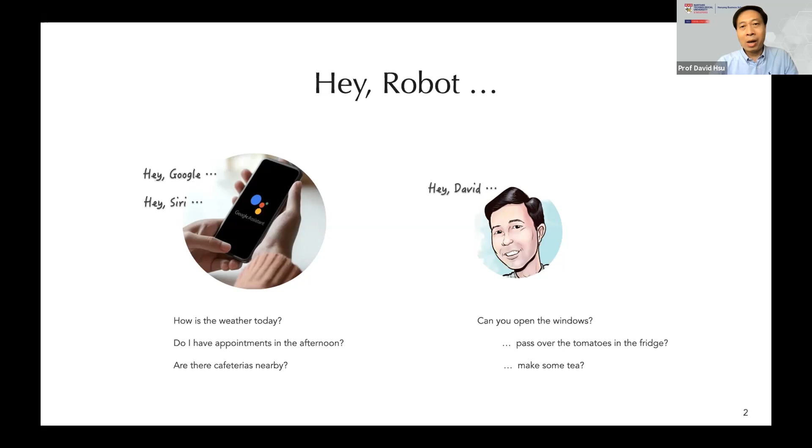Can you pass me an item in the fridge? Or can you make tea? Anything that requires physical actions, Google cannot help with. And that tends to be the kind of things I hear from my wife during the weekend. Since Google cannot help, hey Google becomes hey David. But I'm an engineer. What I want to do is build a robot helper to answer my wife's calls, so that hey David becomes hey robot.

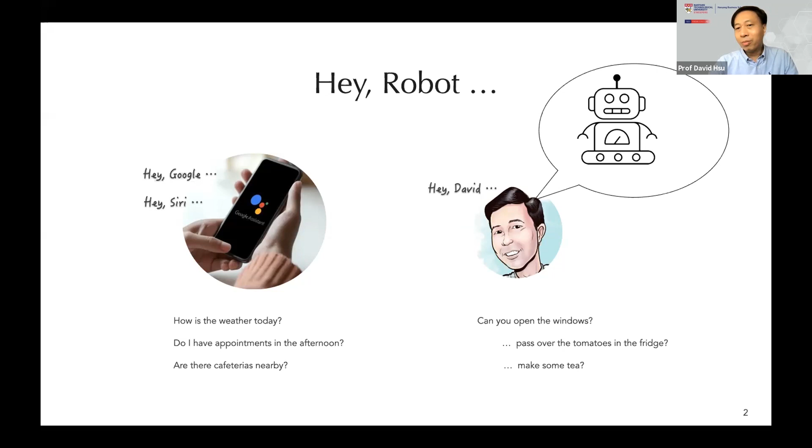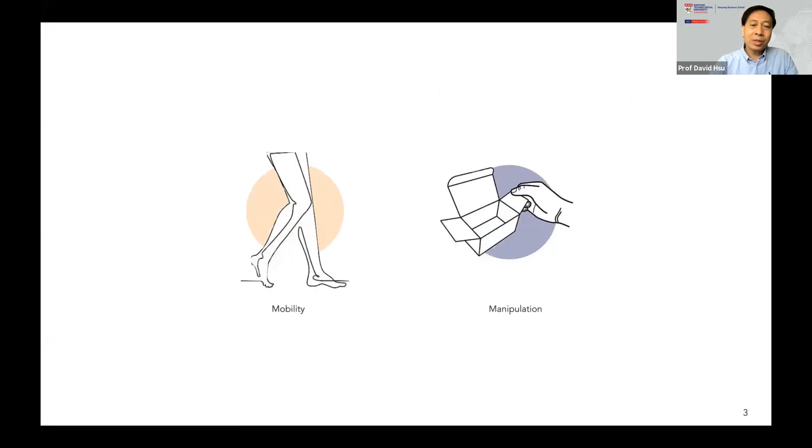To build such a robot helper, the robot must have a basic set of capabilities: mobility, to be able to move around, and manipulation, to use hands to interact with a variety of common daily objects in our household. Let me tell you some of the things we are doing here in our NUS laboratories.

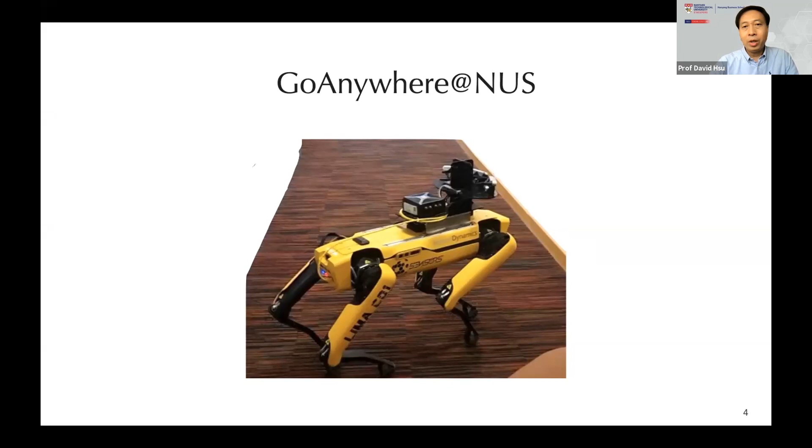So to be able to move around, we acquired this legged robot, which we can purchase. But the legged robot itself can move around only under teleoperation, where a human must directly use joysticks to operate it. So what we did is put on top of that a sensor package, mainly cameras, sometimes GPS units as well.

This way the robot is able to see and be aware of the environment around it. More importantly, this rectangular box behind processes the sensor input, connecting what the robot sees with the command of where to go next. With such a system, we hope our robot will eventually go anywhere on the NUS campus, and maybe even anywhere in Singapore in the future.

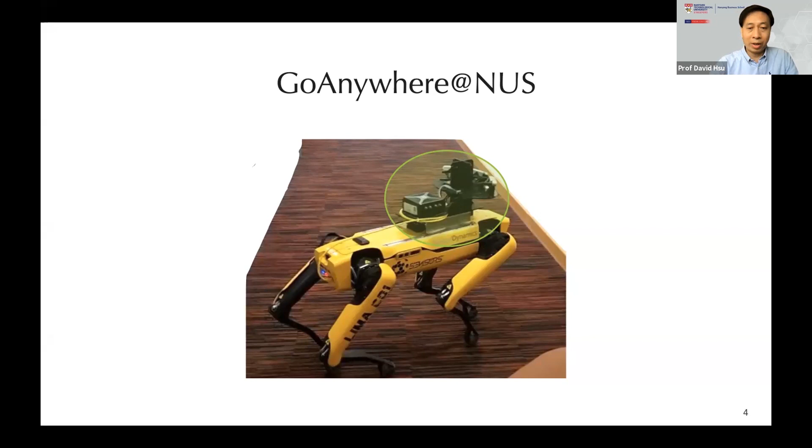Now let me show you what our robot is capable of today. This is the NUS campus, Kent Ridge campus, right behind our building.

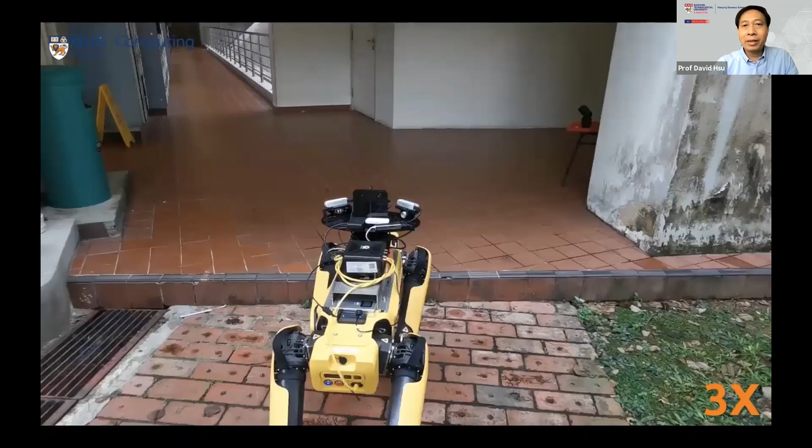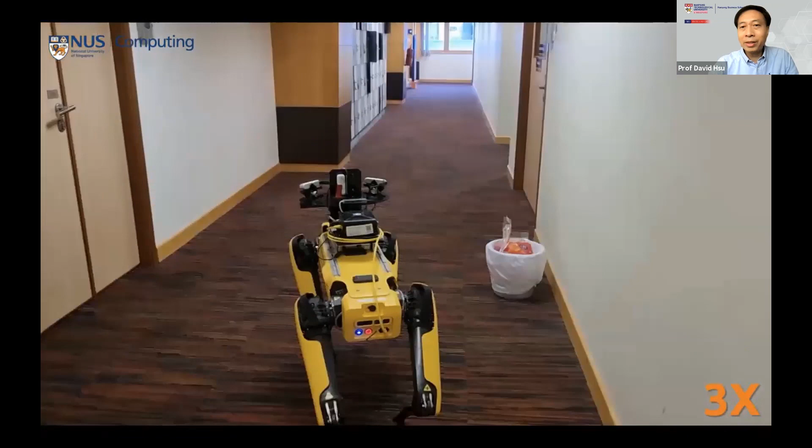There's a human blocking the way, it's going to stop. Entering our building in a semi-autonomous way, navigating an obstacle. Oops, there's an unexpected obstruction like this chair. The robot stops at a door, a glass door. The door opens, the robot realizes, moves forward, staircases, gives right of way to people.

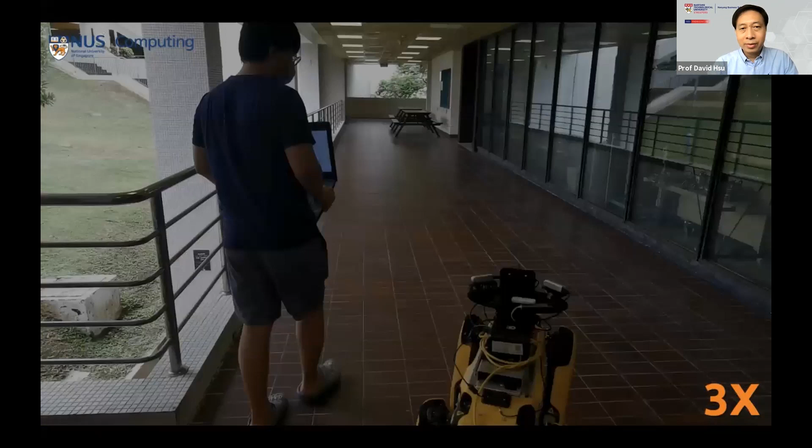You can see that our robots can operate in a wide variety of different environments, different kinds of ground surfaces. Some are tiled, some carpeted, some paved. It can also handle different lighting conditions, dark and light, and it navigates flat surfaces, goes upstairs and downstairs, and so on. So it can handle an enormous amount of variability, significant change in operating conditions.

Variability is very important for robot performance. Another thing important for humans is a sense of touch. A human has a very delicate sense of touch. In fact, that's a precondition for our agility in handling a wide variety of different objects.

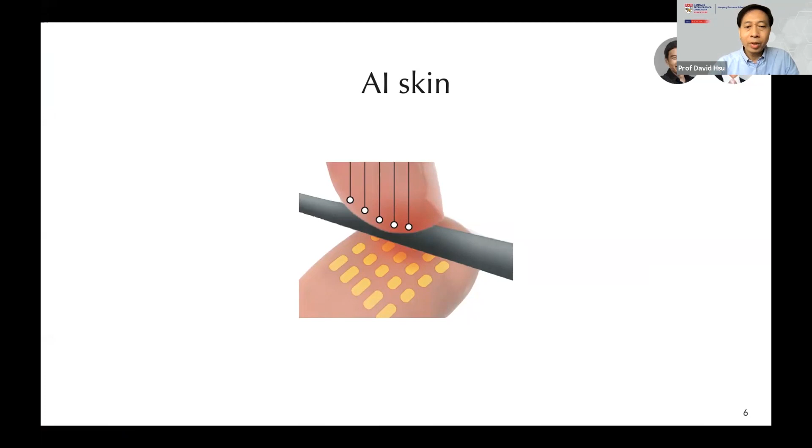So at NUS, my colleagues Benjamin Tee and Harold Soh are developing new materials and sensors in order to give our robots a high resolution, very accurate sense of touch, and they call it NUS AI skin. Now, when we put this AI skin on the fingertip of our robots, let's see what our robot can do.

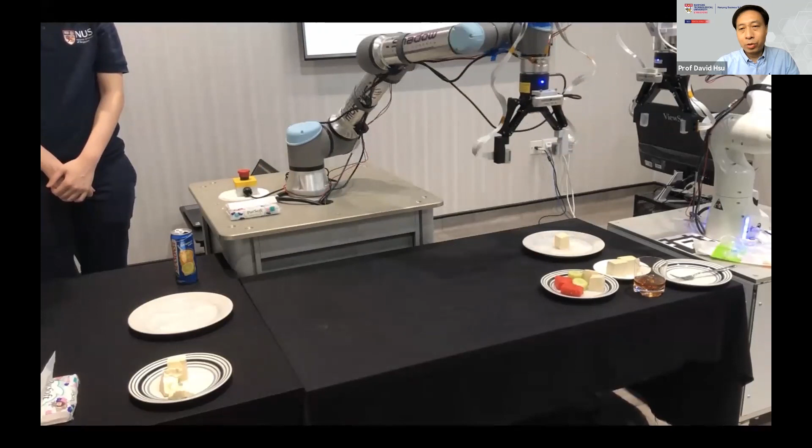It's going to pick up a piece of tofu. For any of us who have tried to pick up tofu, we understand the importance of that sense of touch. Without it, we wouldn't be able to apply the right amount of pressure, and the tofu might fall, or if we apply too much pressure, the tofu gets squashed and becomes soy milk.

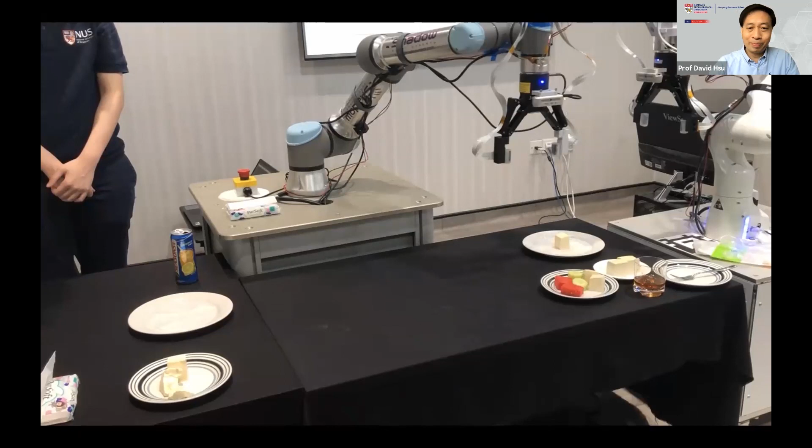Now, beyond NUS, in the greater robotics research community and robotics industry across a wide variety of fields, there are interesting robots. Let me start with one you're probably familiar with: these industrial robots that line up on assembly lines. They are very fast, reliable, very powerful, and work tirelessly. Because of them, we have cars and other manufactured goods at moderate prices. But they are kind of dull, right?

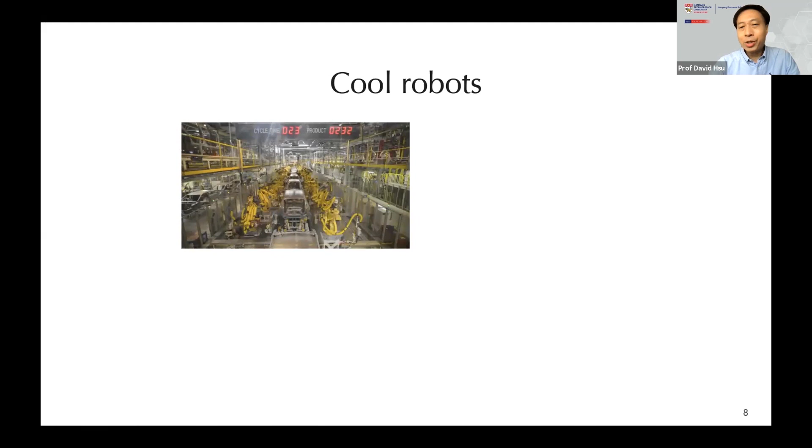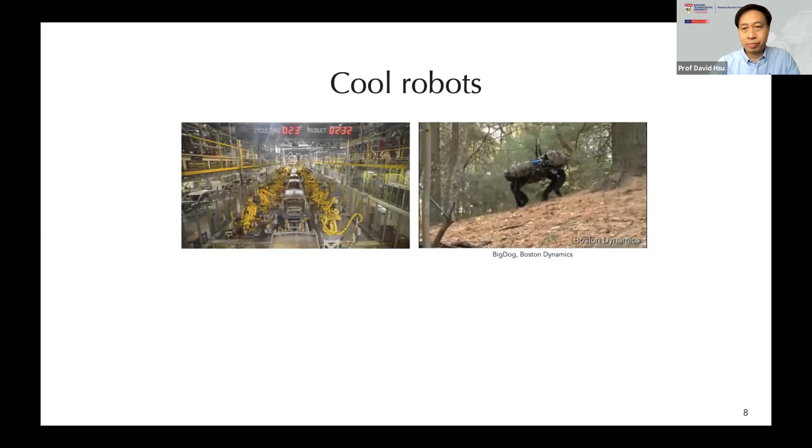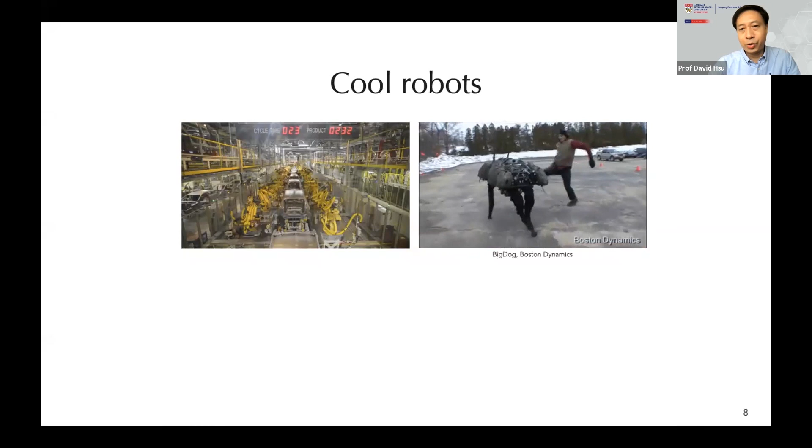In recent years, we have a lot more interesting robots. This one, called BigDog, also from Boston Dynamics, you can think of as a bigger and more capable cousin of the Spot robot I showed you earlier. It can navigate very difficult terrains, and has an amazing ability to balance itself dynamically and sustain disturbance, like this powerful sideways kick. Most of us, if we got that, would probably fall.

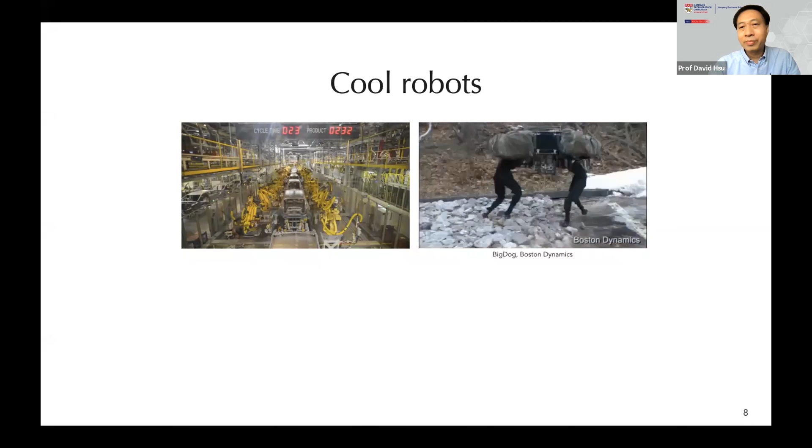It can even balance itself on a sheet of ice. Extremely challenging—look at the fast steps to regain the balance.

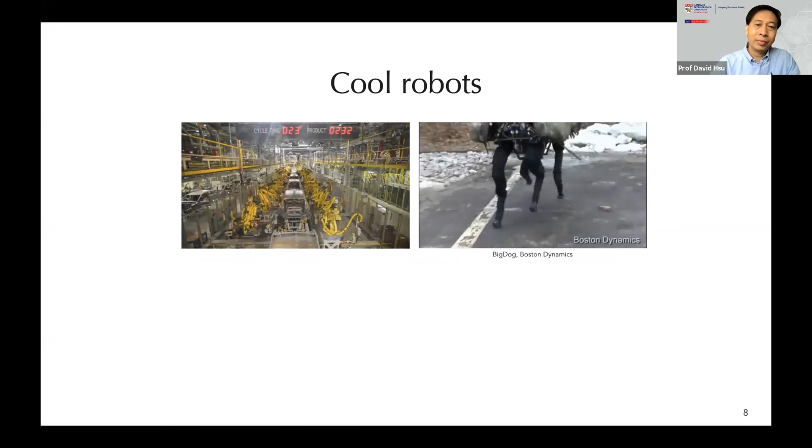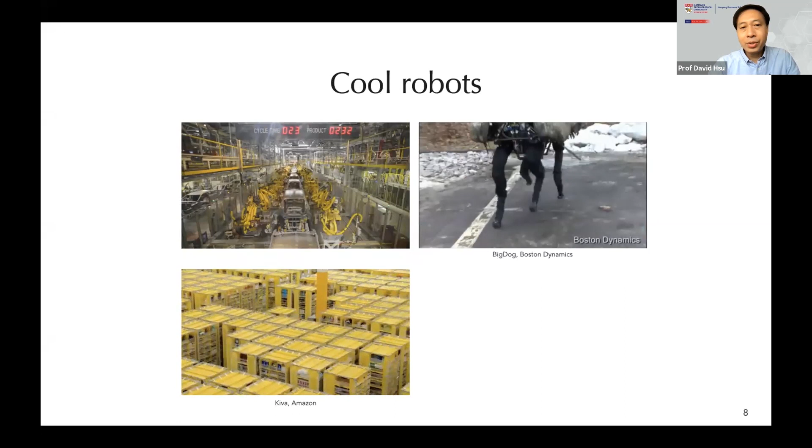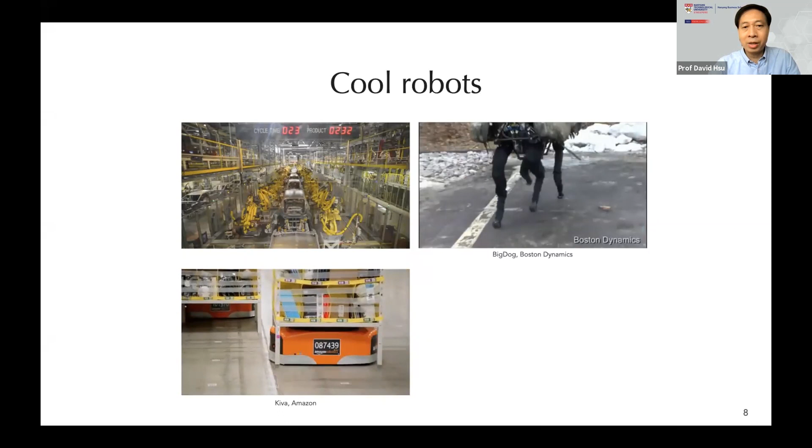Sometimes robots take unusual forms, and this is Amazon's e-commerce warehouse. Each of the shelves over there is actually a robot. To be precise, the shelf itself is stationary, but a base robot platform engages with the shelf and carries it around to a packing station, where a human packer picks up the items and puts them off for shipping. By doing this, the human packer can stay stationary while the shelves move around to the packing station. This reduces the total distance the human packer has to travel and vastly increases the efficiency of the warehouse.

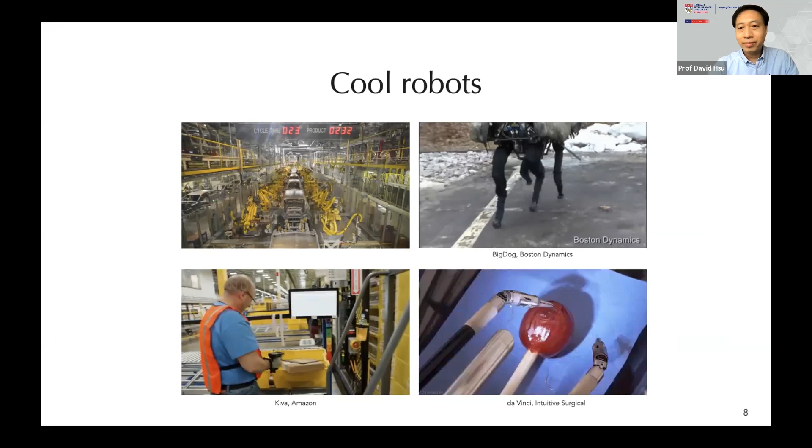Now let's try to tie a knot. This is just amazing, right, what robots can do.

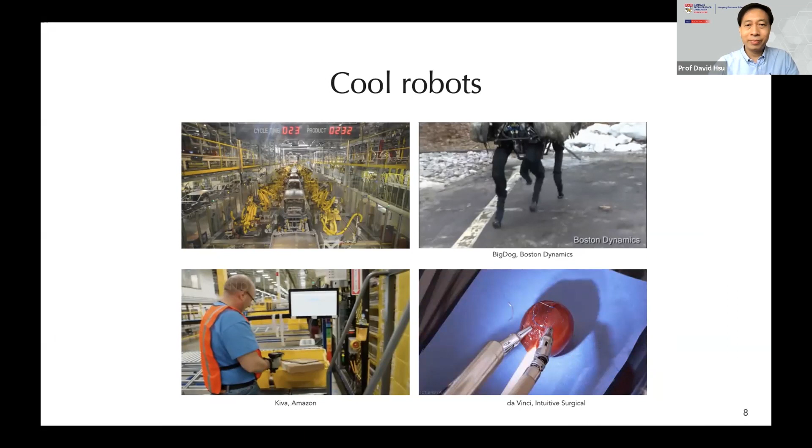Beyond autonomous driving, there's a lot of excitement in other parts of robotics as well. I picked up an industry newsletter—you can see investment in robot startups in manufacturing, agriculture, and cleaning services. And of course, there's always a lot of interest in autonomous driving.

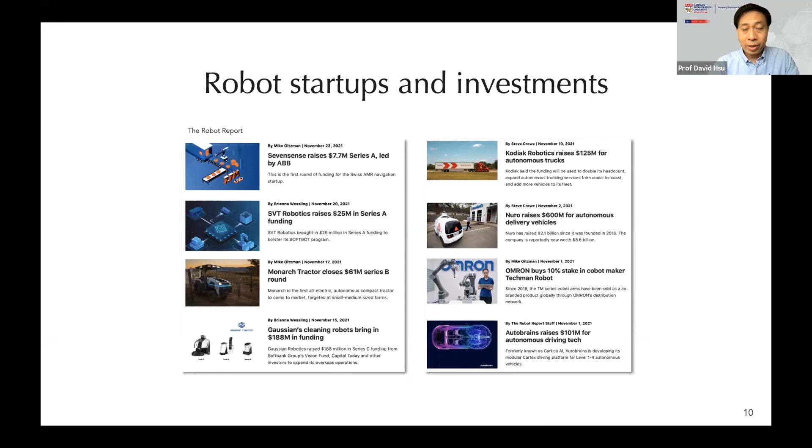Companies are also building collaborative robots to work with people together—they're called cobots. If you put together the numbers on this slide, it adds up to $1.1 billion, and that's only an incomplete compilation from a particular industry newsletter for the month of November—that is, this month.

Singapore, being a technologically advanced nation, has a piece of the action as well. About 10 years ago, NUS and MIT together collaborated at the Singapore-MIT Alliance program and built Singapore's very first self-driving car. That's the base technology that eventually led to the launch of nuTonomy, which was later acquired.

There are a lot more startup robotic companies in Singapore if you go visit Block 71 or NTU's Tech Park. NTU also has a huge robotics center, and for NTU students, faculty, as well as alumni, if you want to see with your own eyes firsthand interesting robots, that's definitely an interesting place to visit.

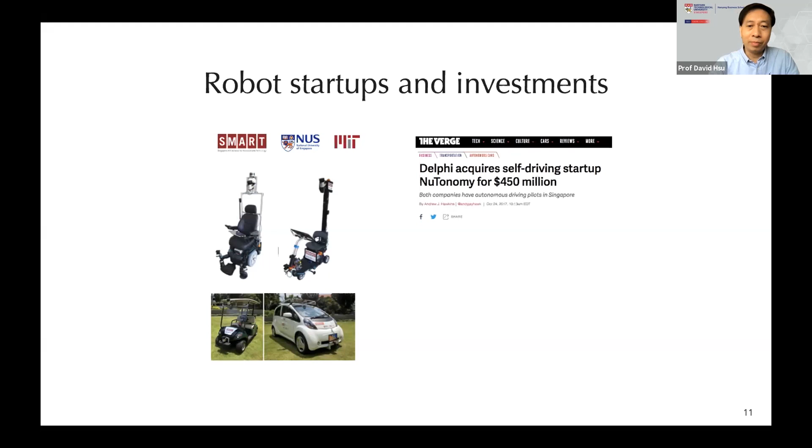Now, with all this excitement, I think it's easy to get carried away and still think about those robots we see in the movies. That would be wrong—maybe that can be my first message to you. Most of the things you see about robots in the movies are wrong, and we do not want to use that as our basis for decisions.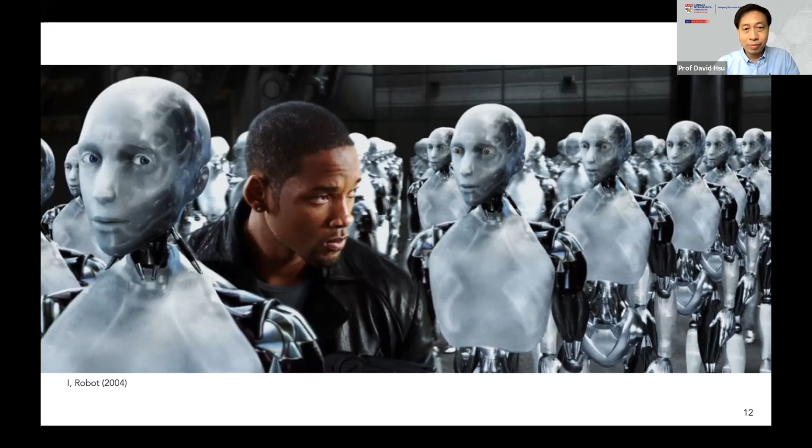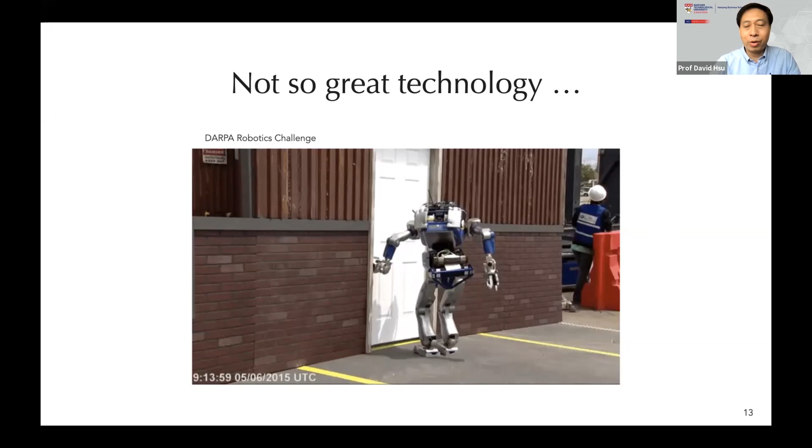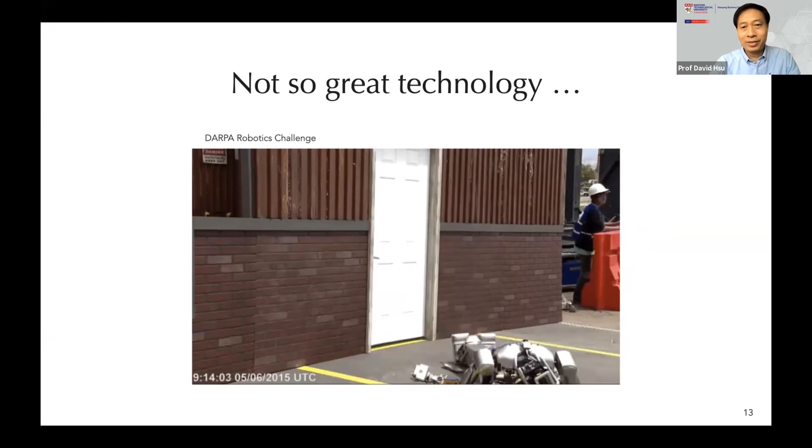Now, to keep us sober, I'd like to show you a couple of examples of not-so-great robotic technology. So this is a humanoid robot trying to open this door. This happens maybe because the robot tries to push forward the door and loses balance. Well, this may be because it fails to detect that the door is already open and tries to push forward, and therefore loses balance.

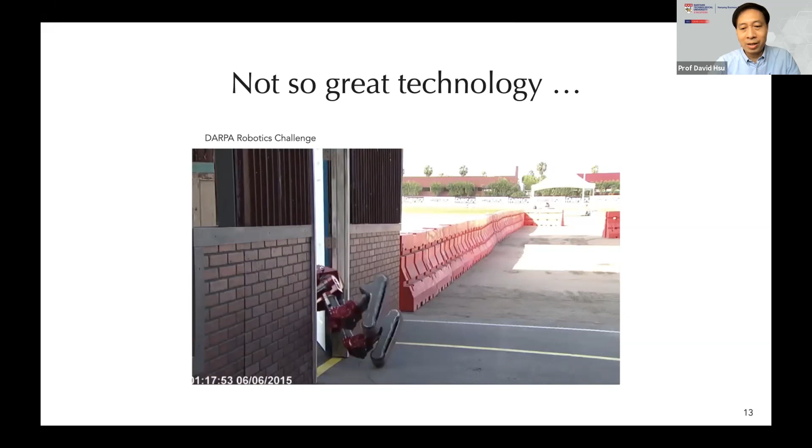How about this one? It's beyond me—I don't understand what happened over here. Now, if you think this is sloppy technology, it definitely is not. This is the DARPA Robotics Challenge in 2015, and they gathered some of the most advanced robots and some of the most capable robotics researchers and engineers. That, in some sense, is the state of the art that failed.

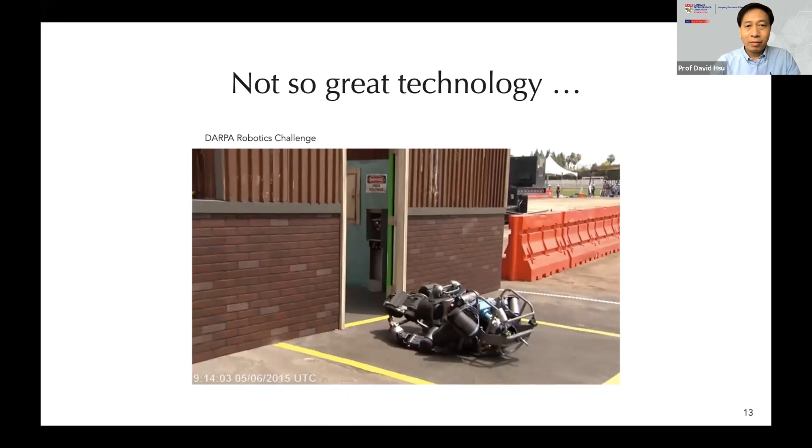Well, sometimes technology is no problem. Around this, also 6 years ago, the BBC reported on drone waiters to plug Singapore's service staff gap—that is, we do not have enough waiters and waitresses, so we want these flying drones to serve food and drinks in our restaurants.

We love flying drones as a cool technology. We would like drones to deliver goods and perform delivery services. But do we really want drones to deliver food and drinks in our restaurants? How about the noise it generates? How about safety? And how long can the battery of a drone last? How many customers can it serve before it runs out of battery? In fact, I wonder, other than the BBC interviewer, how many customers this drone has ever served?

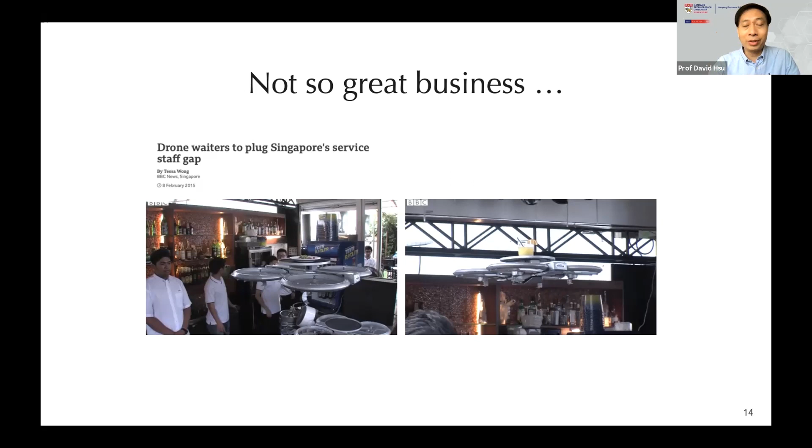So there's nothing wrong here. There's nothing wrong with the technology per se, but it's a misuse or misdeployment of the technology. And today, if you try to find this restaurant or find the drone that delivers food and drinks to serve in the restaurant, I'm pretty sure you won't be able to find it.

Now it seems paradoxical here. On one hand, we have these amazing robots that can perform surgery. On the other hand, this state-of-the-art robot cannot even open a door. So what's going on over here?

But the overall success of a robot system depends on the variability of the operating environment and how well the robot can handle all these variabilities. If we just watch a robot demo, especially a video, and believe our eyes, what we see, without context, without technological background, that's going to be very dangerous. I want to emphasize: the ability to handle variability determines the overall chance of success of a robot system.

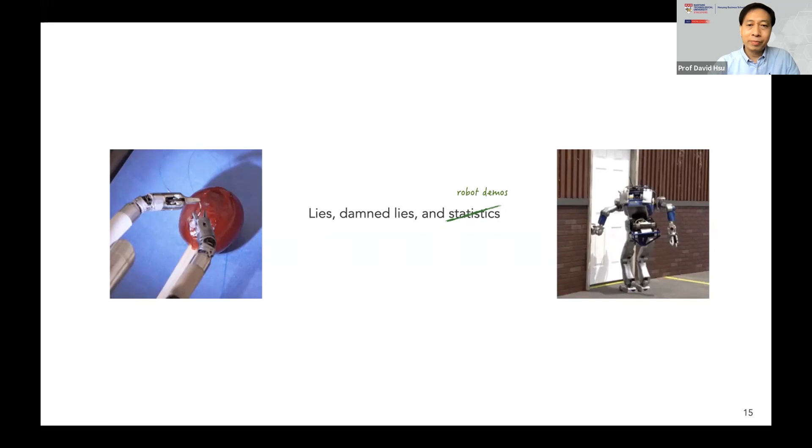Now, on the left, if you look at the surgical system, despite being very complex and requiring very sophisticated actions, in fact the variability is quite limited. Surgical operating theaters are tightly controlled, and the patient is under general anesthesia and hardly moves at all. But more than that, the Da Vinci system is teleoperated by a professional, a surgeon, and any residual variability is handled not by the robot system, but by the human.

In contrast, the autonomous humanoid robot system has to open a wide variety of doors. On your way back home from the office today, maybe take notice of the different kinds of doors you go through. Most of them are hinged, but some are sliding doors, some are even folding doors. Also take notice of the different kinds of handles we have on our doors - some have vertical bars, horizontal bars, others have handles, knobs, and all this variety. Our autonomous robots must take care of all of them.

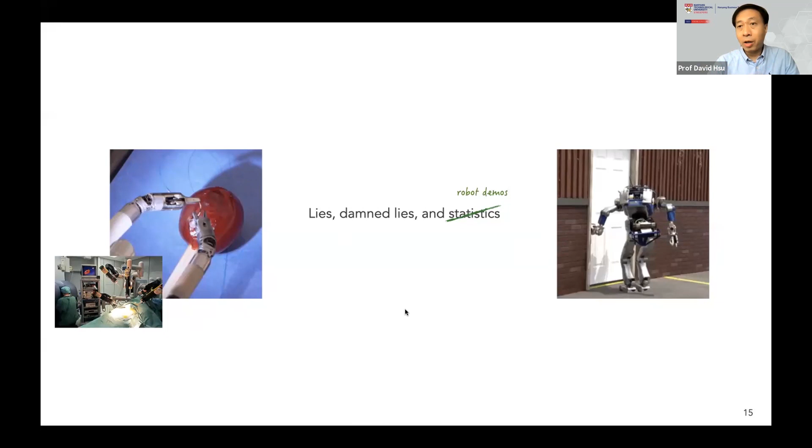And that's the variability that causes the failure of our autonomous robots. So oftentimes we underestimate the importance of variability and adaptivity, and overestimate the importance of speed, strength, and precision of a robot system.

And this bias is there for a reason. If you think about ourselves as humans compared with our animal peers, we are not very fast, not very powerful, and not even very precise. On the other hand, we are highly adaptable. It's probably for this reason we survived hundreds of thousands of years and almost climbed to the top of the animal kingdom. So those things we have - adaptivity, ability to handle variability - we don't care about very much. We care about those things we don't have. But if we carry this bias when we evaluate the performance of a robot system, that is a danger. It's important to keep that in mind. Variability and adaptivity are extremely important for the success of a robot system.

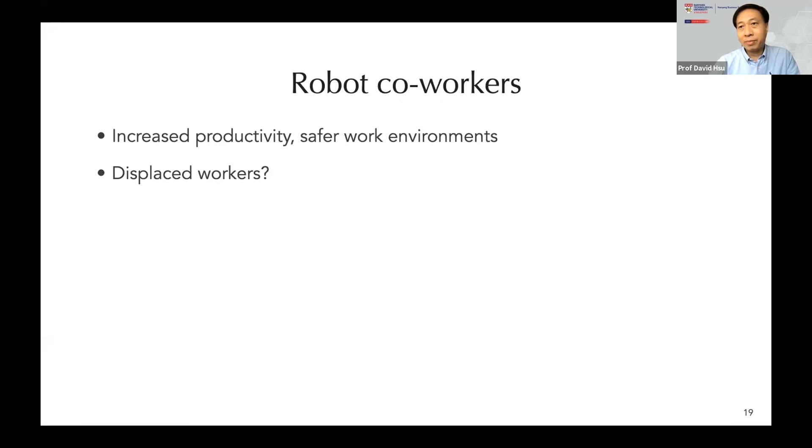Robots can indeed help, and this has been practiced already for decades. We can use robots to reduce human labor and increase productivity. For certain kinds of work environments, it's actually dangerous for humans to be in, and it's great to put robots there instead. Now there's a side effect of doing this: what are we going to do with the people, the workers who are displaced by robot workers? This issue is usually not as much a problem in Singapore, but in most other parts of the developed world, in the Western world, that is a real major issue, and it's actually very important. We must handle that in order to guarantee the long-term survival and thriving of the robotics industry.

Now, instead of replace, this is a complex issue. There are many dimensions to the solution, from a robot technological standpoint. So what we can do is get robots to work with humans together. Instead of replacing the workers, we can have the robots work with the humans together, so we can see complementarity between the capabilities of human workers and robots. We use robots to expand human capabilities instead of using robots to replace human workers.

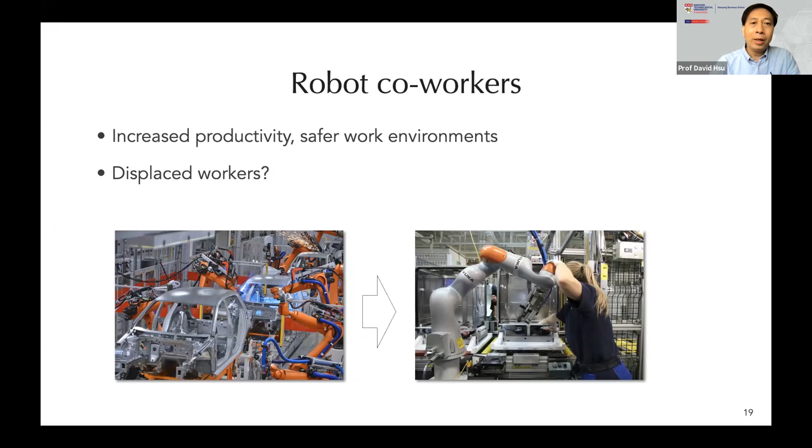And another thing that robots can help with are robot helpers. Robots can help provide better care and assistance to elderly people living at home, prolong the duration of their independent living, improve their quality of life, and help them lead a more meaningful and fulfilling life in their senior ages.

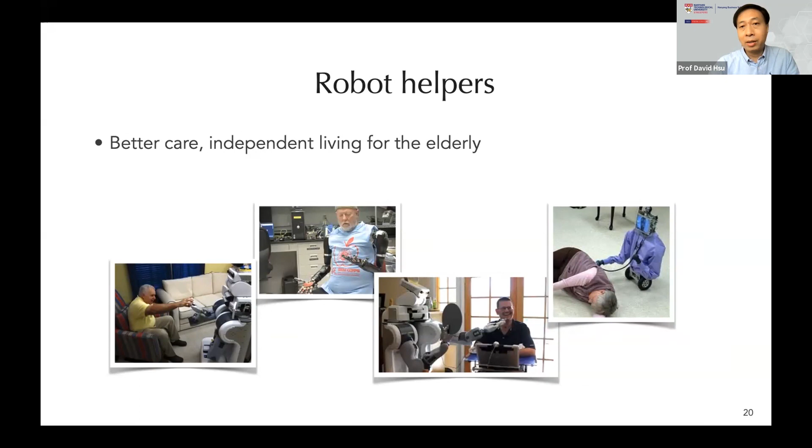So what we want is a new generation of robot technology that would enable robots to interact and collaborate with humans seamlessly. But this new robotics is in fact very different from the old robotics. In the old robotics, you can see from the picture that there's no human there. We focus on autonomy; autonomy is an end goal in itself. We get rid of the humans, and we want the robots to be fast and accurate. To achieve that, we give robots very rigid structures and power them using very powerful motors, making them very fast and, at the same time, very dangerous.

Now, in the future, we want robots to work in homes and offices, in close proximity with humans. For that, in our home environments, robots must handle a wide variety of different situations. We want the robots to be aware and able to adapt to all this variety and to cater to human needs and preferences.

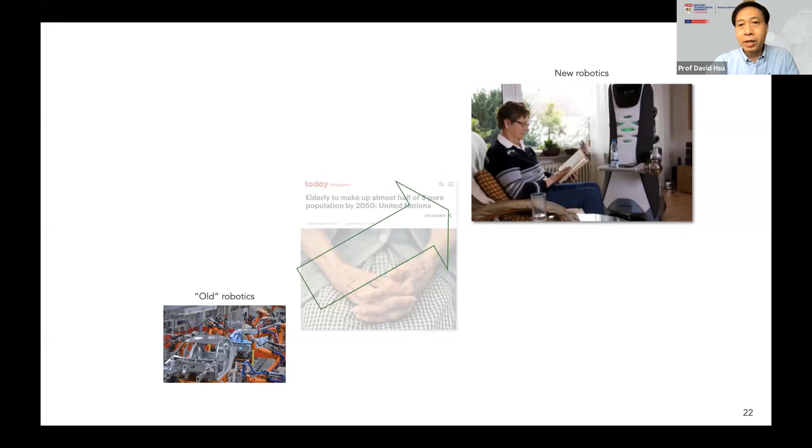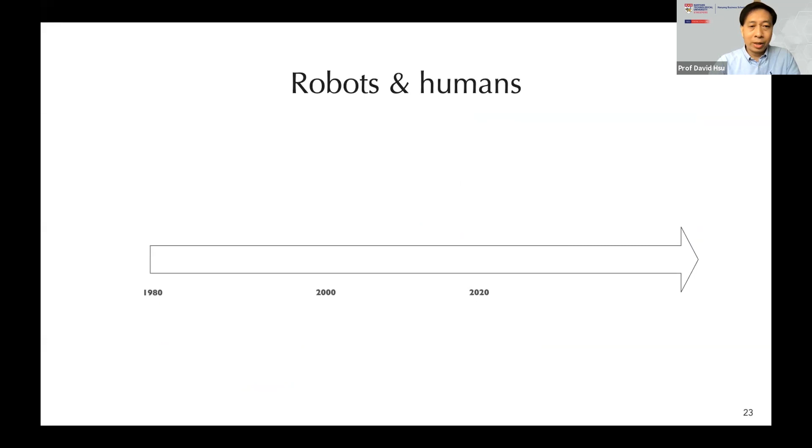So how do we achieve that? Maybe we can look back into the history of robot technology and find some hints. More than half a century ago, the manufacturing industry was among the first to adopt robot technology. The idea there, in order to deploy robots successfully, was a strategy to remove the humans. In fact, those robots were so powerful and dangerous that we had to keep humans away. Once we remove the humans, we also remove a significant source of variability, and on the assembly lines, the parts come in at the right place and right time, and the robots just need to act on that as fast as possible.

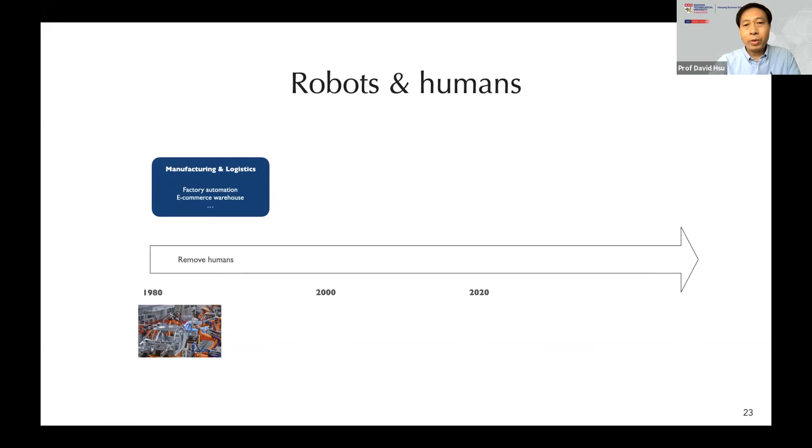Now, fast forward 20 years, at around the turn of the millennium, and that's the era that starts autonomous driving, self-driving cars. There we cannot really remove humans, and the cars will be on the road and will have to interact with humans and with cars driven by other humans. But the very nature of the driving task itself says that what we need to do is keep our robot vehicle a safe distance from pedestrians and other human-driven cars. So we could call that robotic technology to avoid humans.

Fast forward another 20 years, it's about the time now. We need robots to help us in hospitals, providing hospital services, and sometimes even rehabilitation. Here, robots get closer, even closer to humans, especially for rehabilitation, for example, where it directly comes into contact with humans. But hospital is an interesting environment—it has most of the basic elements of life, but at the same time it's semi-controlled. As patients, when we visit hospitals, we happily follow instructions from doctors and nurses. We willingly give up some of our so-called freedom in order to receive proper medical care. So the variability can be controlled to an extent.

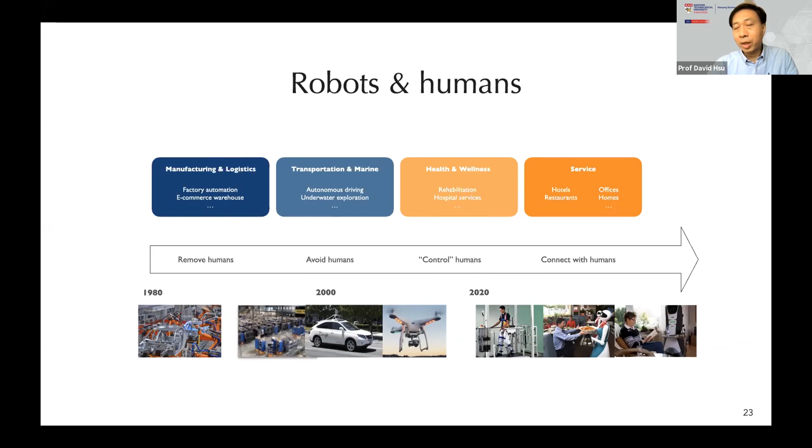It is not possible to control the environments over there, and humans will make a wide variety of different requests, and the robots will come into very close proximity with humans in order to perform those services. We need the robots to understand human intentions and preferences in order to perform those services. It seems that the old strategy doesn't quite work for the future, and we need the robots to connect with humans much more closely.

To do that, we almost have to rebuild a new technology stack and connect humans and robots at multiple levels. At the lowest level, we need to build the robots using new materials. Why? For safety. The old robotics is very rigid, very stiff, and very strong.

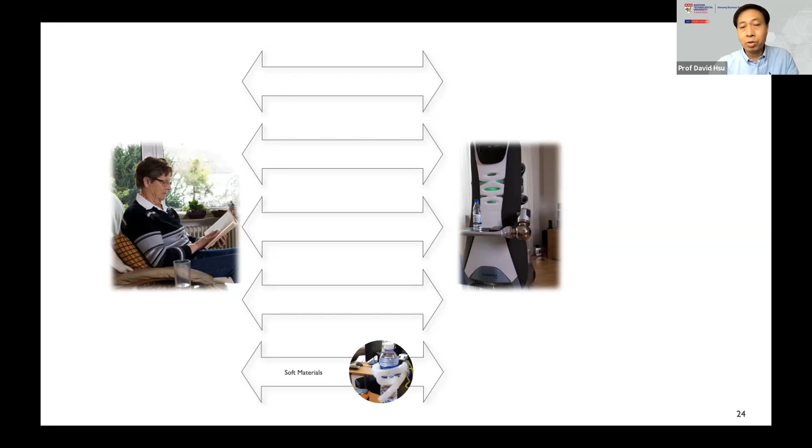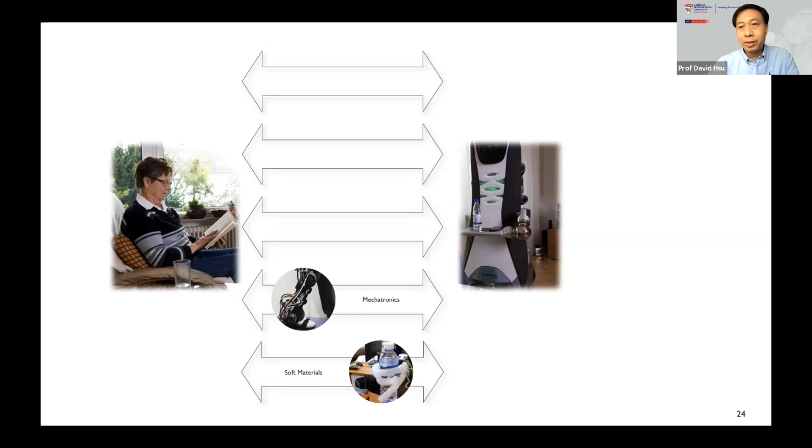If a human ever comes into contact with those robots, injury is the minimum, death is a possibility. Now compare that with the materials and structure that form the human body - it's very different. Humans have a musculoskeletal system covered by skin, so even if we come into contact with another human, there's only limited damage. So we want to build robots using soft materials for sensors and actuators, so that even in the worst case, the contact occurs and the damage and injury is contained. We need new mechatronic controllers that can actively sense impact and contact and respond to them appropriately.

How would we like to command our robots? We could say that maybe for some of us, we could say the nerds - we can program the robots. That's definitely a possibility, and that's what we do in our labs. But if we want to deploy robots in our household, say in our kitchens - do we program our fridge? Do we program our microwave oven? We don't program any of those things. So why should we program our robots?

We should be able to instruct our robots in a natural modality of interaction - speech, human language. That's what we usually do with human helpers, and we should be able to do the same with robots. So the robots must understand human speech. But human speech also has limitations - sometimes it's vague - and therefore we need additional modalities of interaction, and we need to design new interfaces to make robots easy to use.

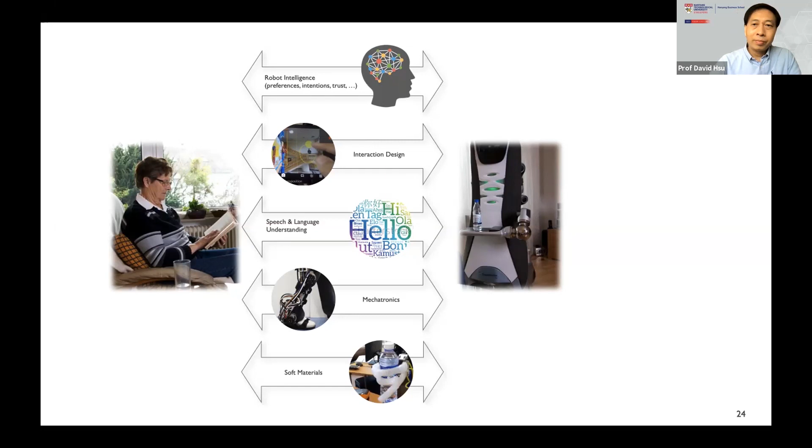Above all, we need the robots to be intelligent. This is the age of AI. This exponential growth of AI technology enables our robots to reason about human intentions, preferences, and even to elicit trust from humans in the robots. Machine learning technology enables the robots to learn to improve their performance through interaction with humans. And communication technology enables us to link together humans and robots.

In fact, large teams of humans and robots together enable them to work together to solve complex tasks. When robots and humans form large teams together, the issue becomes: how do we form such teams? How do team members communicate with each other? How do they communicate their goals and plans in order to coordinate? It is in this place, I think, that the study of robots will intersect significantly with the study of humans. Many of the issues studied in humanities and business schools, the study of human behaviors, will become important for the future of robotics.

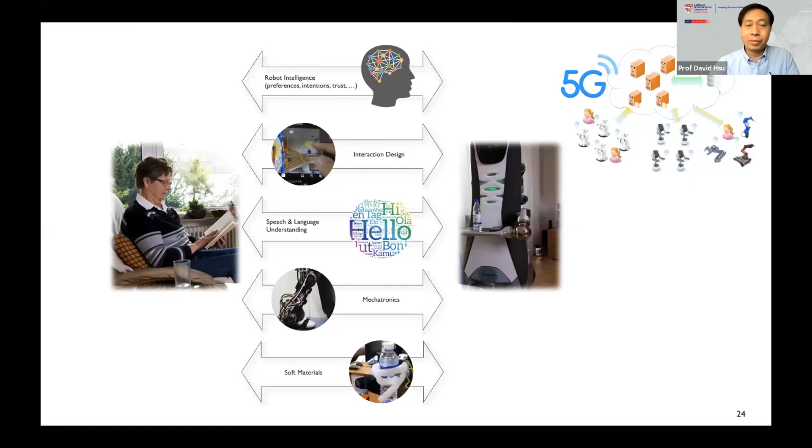And 10 years later, about 2011 or 2012 or something like that, we wanted to buy a new robot - a KUKA robot. KUKA is the latest cobot, a collaborative robot that works with humans. KUKA is Germany's most advanced robotics company. We wanted to buy this robot, but back then KUKA didn't even sell this robot in the Asian market at all. So I was talking to the KUKA executives and tried to convince them to sell us that robot. I did succeed in that.

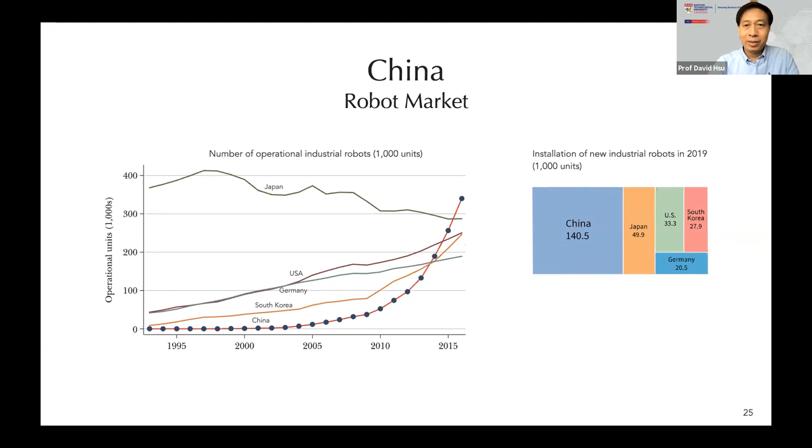Now China today is not only a net consumer of robots, it's also increasingly becoming a powerhouse of new robot technologies.

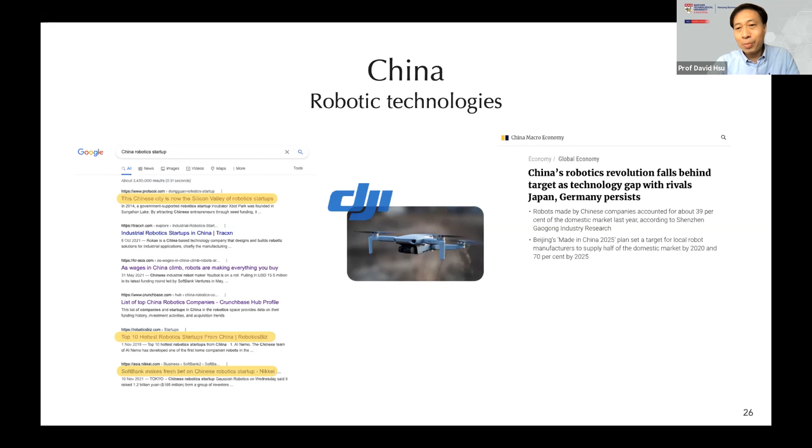But not all things can be compressed in time. Robotics requires hardcore technology development. We also find out that even though China is moving very fast, some of the hardcore technologies are still lagging behind the established players in Japan and Germany. But if it takes time to develop and catch up with technology, for a country with lots of resources...

Maybe you can just acquire them. So you can see that Midea completes the acquisition of German robot maker KUKA. KUKA is the company I mentioned earlier, Germany's most advanced robotics company. It just got acquired by China 3 or 4 years ago.

So China is a large, complex country, and the Chinese robotics market is also large and complex, with all these things coexisting there.

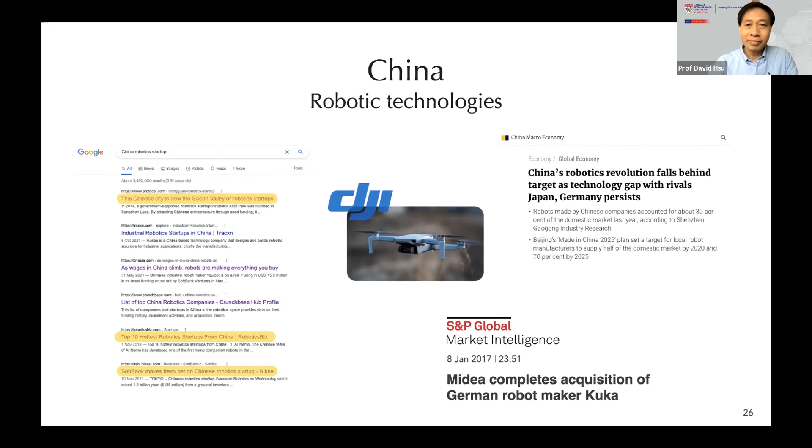In terms of examining robot technology, we can look at the potential success and risk of deploying robot technology. I think we can take a look at two main factors: one is environment variability, how much the operating environment varies; the other is human interactivity, how closely the robots must interact with humans.

Now, if in the future we want to deploy robots in, let's say, hospitals and health and wellness sectors, the environment variability is at least somewhat contained, but the requirement for interactivity with humans is very, very high. That's hospital services, and some of those services require direct contact with humans.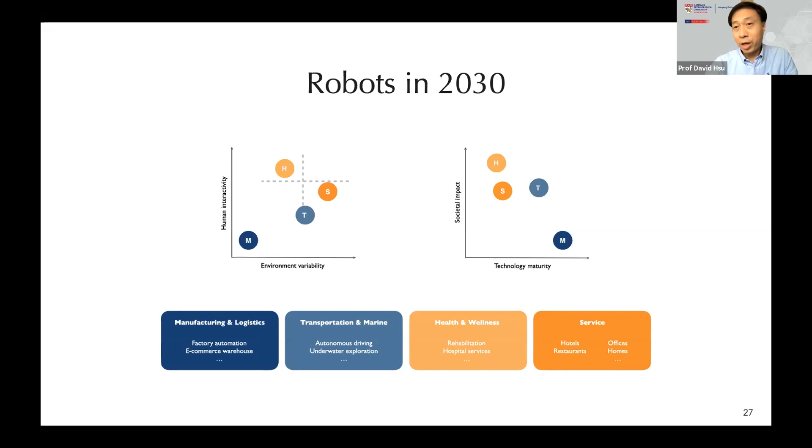Let's take a look at the transportation industry. In this chart, if you stand in the top right corner, it means the technology is relatively mature and the benefits are large. That's somewhat where the transportation industry's autonomous self-driving lies. The technology, I think, is almost on the cusp of being ready, even though there are still some hiccups. Transportation mobility is extremely important for all of us, and that's why the autonomous driving industry is so hot and attracts so much investment.

Now, if we want to think about hospital services, health and wellness, the benefits are enormous. Human health is extremely important, but unfortunately our technology is not quite there yet, so there are lots of opportunities, but also a lot of challenges there.

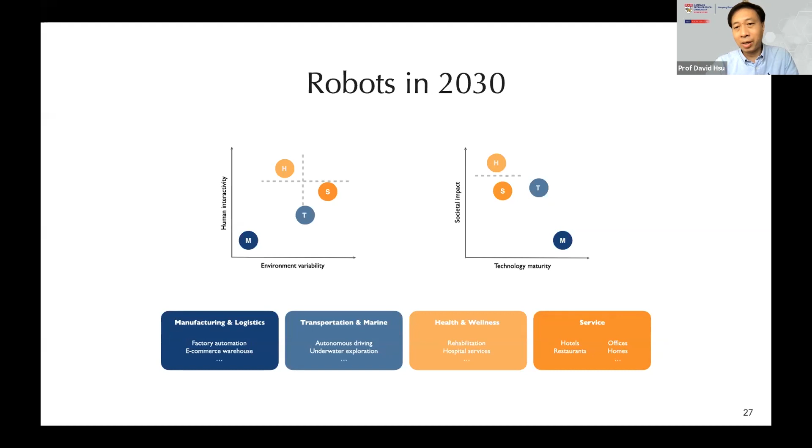The hospital service robot is in fact an instance of a class of robots I would call professional service robots. In these domains, there is usually substantial variability, but robots interact with professionals, and in those environments the variability can be somewhat controlled, with professionals through training taking care of the remaining variability. So there's lots of opportunity to come, including hospital services, professional cleaning, construction, underwater exploration, firefighting, and so on.

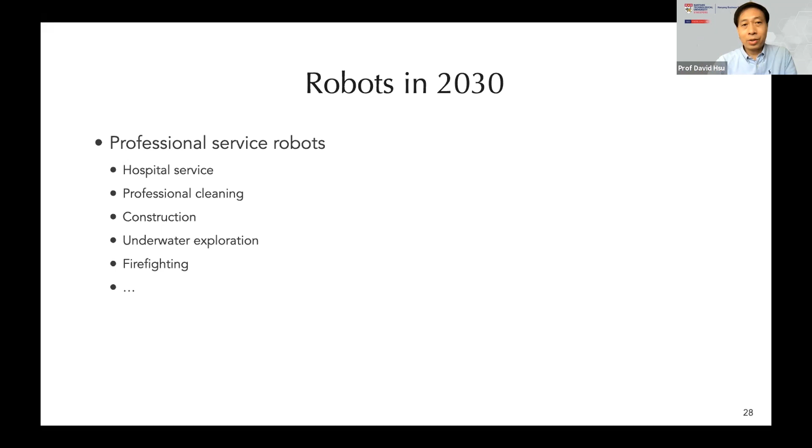One successful example of that is actually autopilot. Some of you may not be aware that the planes we fly on - because of COVID we don't fly that much anymore, but we used to - are actually robots. Most of the time these aircraft are actually flying by themselves, but the pilots are trained professionals. So if we think of the autopilot flight control system as a robot, this is again basically a professional service robot. It does not directly interact with the passengers, but it is under the control of a professional like a pilot. So these sectors have enormous opportunities to come.

I'm very confident that the robotics industry has a bright future ahead, and the demographic trend assures the demand. The new technologies, AI and 5G, are driving forces of technology transformation in the short term. In a slightly longer term, we need to understand humans a lot better. China is rising as a huge market for robots and increasingly a powerhouse of robotic technologies. Singapore is in the immediate geographic neighborhood of China - we stand to benefit.

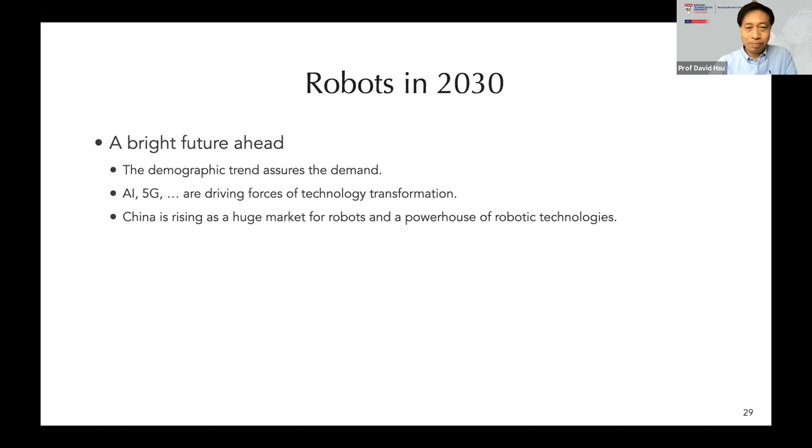Let me end by saying that all technology developments ultimately must serve the purpose of improving human conditions in order to be meaningful. So we want to develop robots to help people by working with people together, and that is our destiny. For myself, I'm hoping to get to the point of 'Hey Robot' before my retirement, so that the Hey Robot will take care of me. That's my end. Thank you for listening.

Thank you, David, for the great presentation. I have learned a lot from it. I find it very thought-provoking. Especially, I like the concept of the trend of robots being very collaborative and representing an effort to serve humans. I was also quite amazed by the drastic development of the robot market in China. Maybe I'll have a question later about this. But for now, I will invite my colleague, Sharon, to take it from here to manage the Q&A session.

Sharon: Thank you, thanks David. That was actually a very interesting talk. I learned so much from what you have to share. Just a quick question though, to start off this Q&A - you presented a lot of different types of technologies in the robotics industries. Do you think, going forward, the robotic industry will be one that is more fragmented, occupied by many little startups, since you see so many companies doing it? Or do you think it'll be one dominated by a few big players? And are there some industries where you think the deployment of robots just will not be accepted?

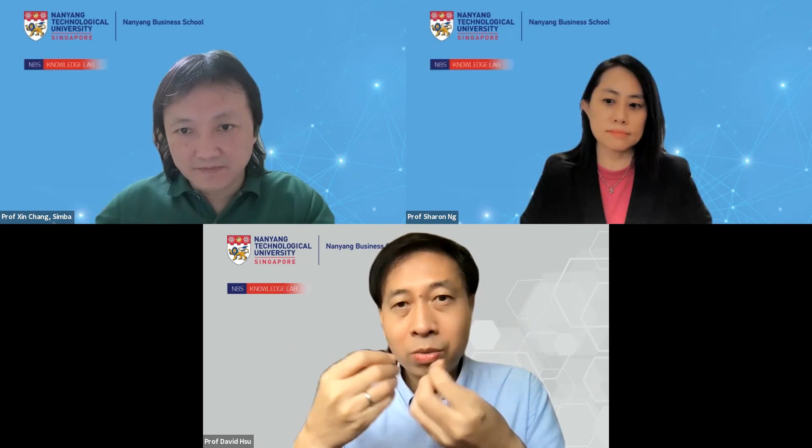So I think the interesting question here is that this partly prompts ourselves as humans to understand our own values, and in fact we have to articulate our values. If we want to turn that into some kind of engineering solution, we actually have to build quantitative models in order to put that into robots. So we probably cannot directly align—at least I don't directly foresee how we align what it means for robot values.

But what we can do is build quantitative models of important notions of human values, for example trust, and put that into robots, and as a result generate robot behaviors that align with our values. I think this is very important.

Once we do that, I think not only will we create robots that exhibit behaviors aligned with our values, but we'll also be able to explain to people—this connects to the AI notion of interpretability and explainability—how these robot systems are actually built and why they would behave in a way that aligns with our values. I think that would engender trust from humans in robots and encourage adoption.

A couple of participants were also interested in geopolitical differences—if you're still talking about China's development, but still sort of behind other more Western countries. Do you have any thoughts on how far behind China's robotics technology is relative to countries in Europe and Japan, and specifically in what areas you think they're behind?